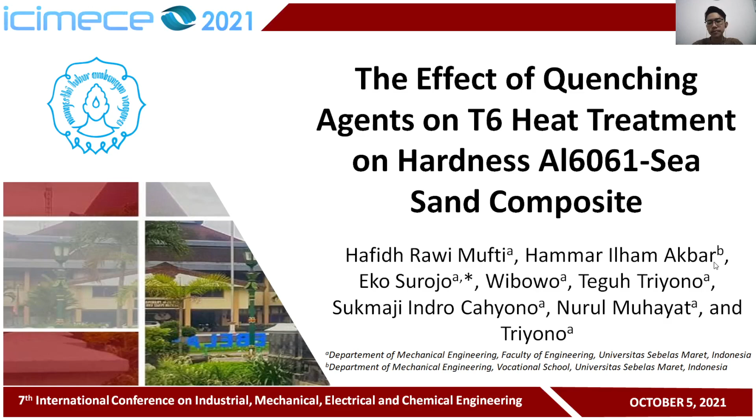In introduction, in the increasingly advanced world of the automotive industry, the demand for superior materials that have high mechanical properties, lightweight, and low operating costs is increasing. For example, in the piston, connecting rod, brake pad, and swing arm components, currently the material used in the manufacture is metal matrix composite (MMC).

One of MMC's products is AMC, aluminum matrix composite, whose main material is aluminum with ceramic reinforcement. The aluminum used in this research is Al6061, with the main alloy MgSi. The 6 series aluminum is usually used in the automotive industry because it has superior mechanical properties, including lightweight, good formability and wettability, as well as good corrosion resistance.

While the reinforcement uses sea sand, which contains ceramic compounds that can be used as a substitute for ceramic powder to reduce production costs. The composite manufacturing process uses a simple method, namely stir casting. Stir casting is a process where the matrix material is mixed with reinforcing particles in a melting condition, which is then stirred to form a vortex to combine the matrix and reinforcement mixture so that the particles are evenly distributed.

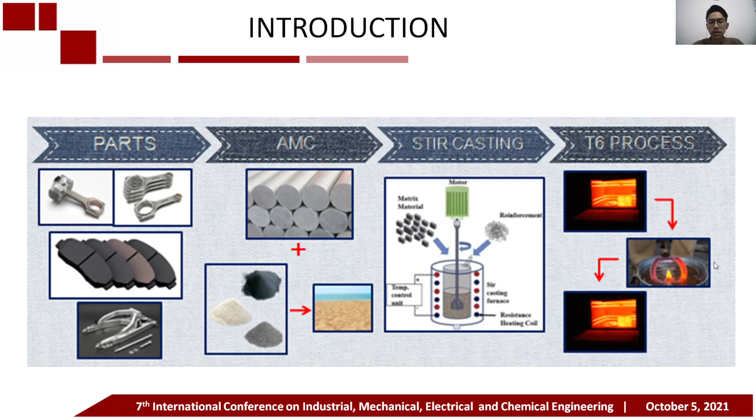In Chapter 2, I will talk about materials and method. The matrix used in the study is Al6061 with the main alloys being Mg and Si. For the reinforcement, we use sea sand, which is treated with an electroless coating. The steps of the electroless coating process are: add 40 ml of HNO3, 40 grams of sea sand powder, 0.5 grams of Al fine powder, and 0.1 grams of Mg powder into a measuring cup, then stir using a magnetic stirrer, and then heat at 80 degrees Celsius for 30 minutes.

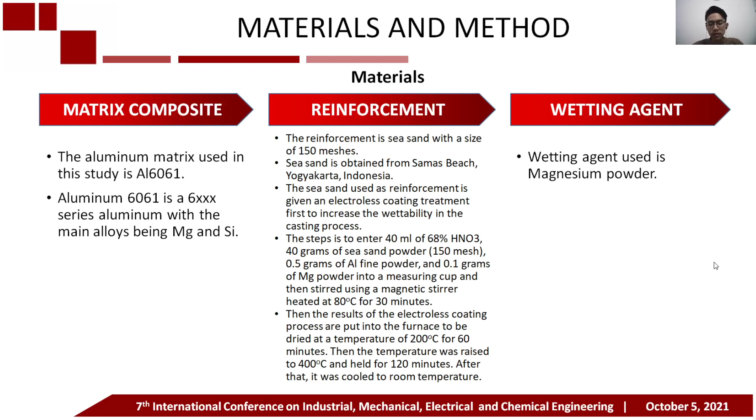Then, the results of the electroless coating process are put into the furnace to be dried at a temperature of 200 degrees Celsius for 60 minutes. Then the temperature was raised to 400 degrees Celsius and held for 120 minutes. After that, it was cooled to room temperature. And the wetting agent used is magnesium powder.

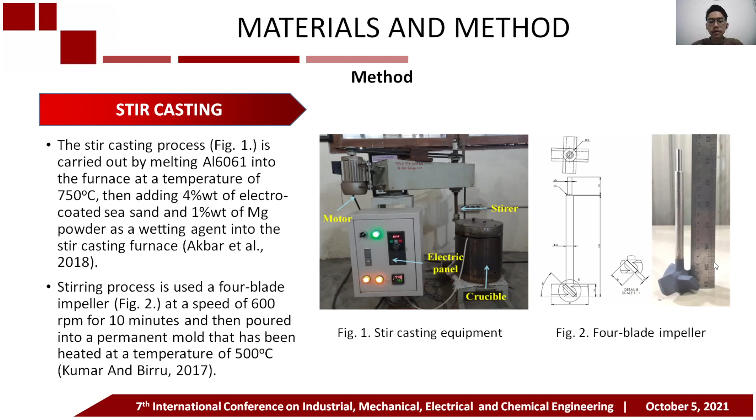The method used in this research is stir casting. The stir casting process is carried out by melting Al6061 in the furnace at a temperature of 750 degrees Celsius. Then, adding 4 wt% of electroless-coated sea sand and 1 wt% of Mg powder as a wetting agent into the stir casting furnace. The stirring process uses a 4-blade impeller at a speed of 600 rpm for 10 minutes, and then it is poured into a permanent mold that has been heated to 500 degrees Celsius.

The heat treatment method is T6, consisting of solution heat treatment, quenching, and artificial aging processes. In the solution heat treatment process, the specimen is heated at 540 degrees Celsius for 6 hours. Then it continues with the quenching process with three variations of quenching media, namely oil, water, and 10% salt solution, and continues with the artificial aging process by heating the specimen at 200 degrees Celsius for 4 hours.

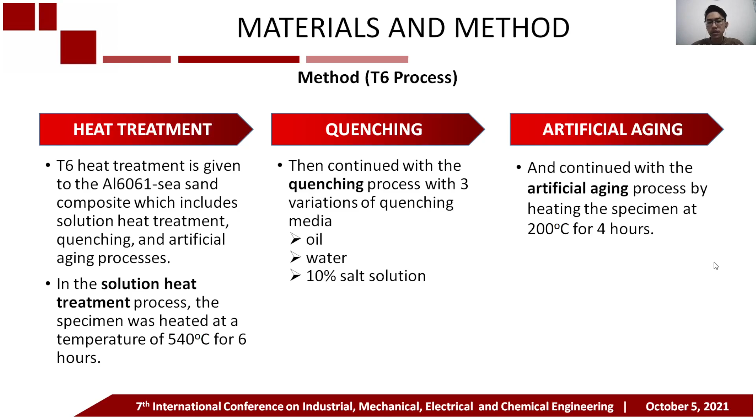There are two material tests, namely hardness and density testing. Hardness testing is carried out using the Brinell method, which refers to ASTM E10. This hardness test uses the Controlab Dia Testor 2RC, Controlab Paris, France. The indenter used is a steel ball with a 2.5 mm diameter, 62.5 kg load, and 30 seconds loading time.

Density testing is carried out using the Archimedes method with digital scales. The composite density is calculated according to equation 1. The porosity can be determined by comparing the actual density with the theoretical density using equation 2.

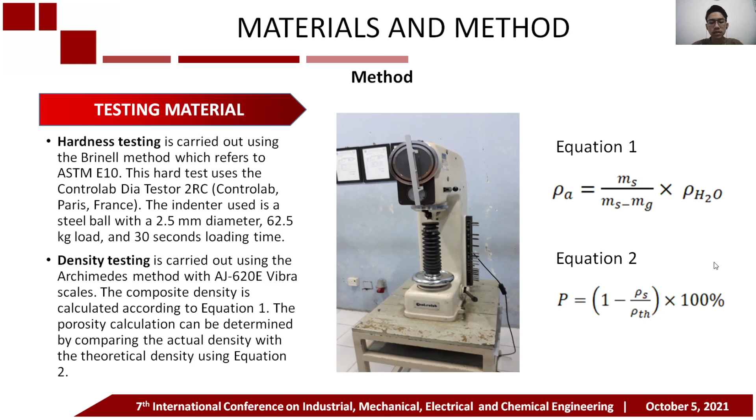This is the table of notation of Al6061-sea sand composite specimens. No reinforcement and non-heat treatment is called ingot. The non-heat treatment is called NHT. Heat treatment with oil is called HTO. Heat treatment with water is called HTW. And heat treatment with brine is called HTB.

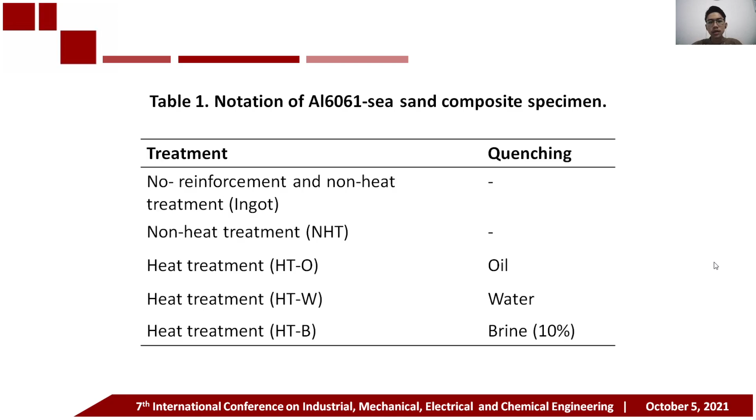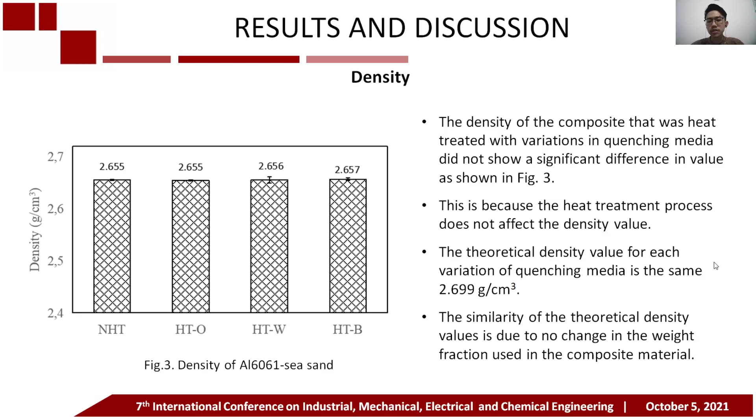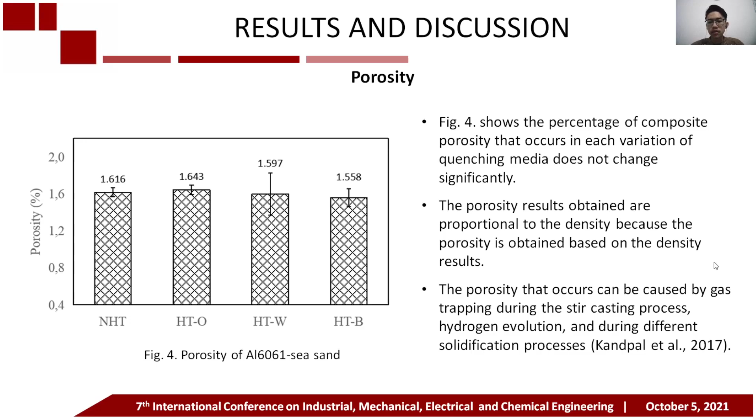And the next is porosity. Figure 4 shows the percentage of composite porosity in each variation of quenching media does not change significantly. The porosity results obtained are proportional to the density because the porosity is obtained based on the density result. The porosity can be caused by gas trapping during the stir casting process, hydrogen evolution, and during different solidification processes.

And then we go to the discussion about hardness. The results of hardness are shown in figure 5. Salt solution or brine has the highest severity value compared to water and oil, which is 2.0 to 2.2, while water has an H value of 1.0 to 1.1, and oil has an H value of 0.3 to 0.35. The higher the H value, the higher the cooling rate and the higher the hardness value.

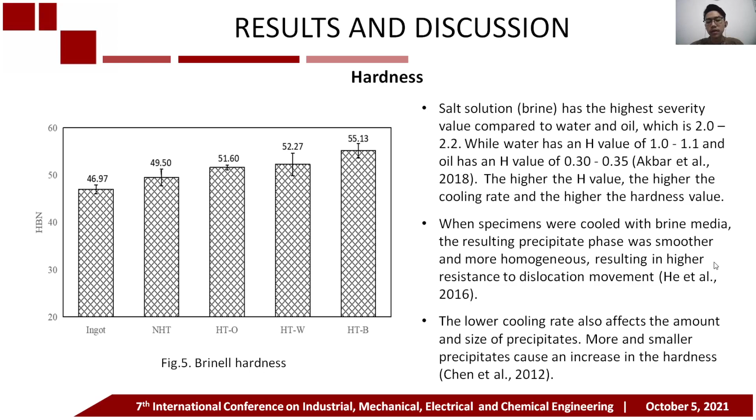When specimens were cooled with brine, the resulting precipitate phase was finer and more homogeneous, resulting in higher resistance to dislocation movement. The cooling rate also affects the amount and size of precipitates. More and smaller precipitates cause an increase in the hardness.

In the end, we come to the conclusion. Heat treatment with the same weight fraction of reinforcement does not affect the density value. T6 heat treatment with oil, water, and brine quenching agents can increase the hardness value of the Al6061-sea sand composite. The higher cooling rate of the quenching agents results in higher hardness values. Quenching with brine resulted in the highest hardness value. The lowest hardness value was obtained using the oil quenching agent.